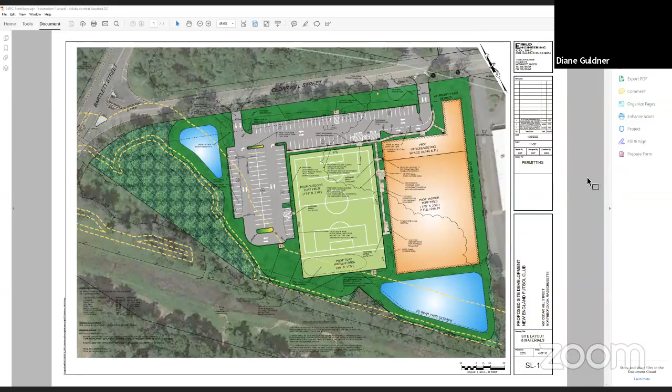Mia, for the most part, I remember this one. We were pretty pleased with the way they were going, right? We had asked for a couple of changes over time. They had made the change, I think, to parking lot size and a few other items. Yes, and where we left it, we had a couple outstanding items that have all been addressed since then. Okay. And they were to get the DEP file number. Was that? Nope. Sorry, wrong notes. Let me grab the correct notes. Here we go.

We were kind of interested in crumb rubber and its effect on the groundwater. And then after our March meeting, we did receive a letter from DCR. And then I threw myself into researching crumb rubber and its effects on groundwater along with Fred. I did find a really useful document; it's called the Coastal Marine Resource Center Policy Projects Independent Group. And they came up with a list of recommendations for containing and managing crumb rubber.

And Rich also was working with some consultants and came up with a large amount of supplemental information that I read through and found that everything he's proposing on site, maybe Rich could take over and show us all the changes he made to incorporate those recommendations. Okay, yes, Rich Riccio from Field Engineering on behalf of NEFC. We met back on March 9th, I believe, was the last meeting. And we were still awaiting a file number, which since came through.

DEP had a couple minor comments on the issuance of their file number. One was that Basin 1 did not have a 50-foot setback from wetlands. If you look at the screen where my cursor is, Basin 1 is the basin on the northwest side of the site, and we were able to massage the grading on this basin so it was completely 50 feet minimum from the wetland system. The second comment was with regards to test pits and soil logs. We do have soil logs on the plans, and we have a minimum of 5 feet of separation to groundwater beneath both detention basins.

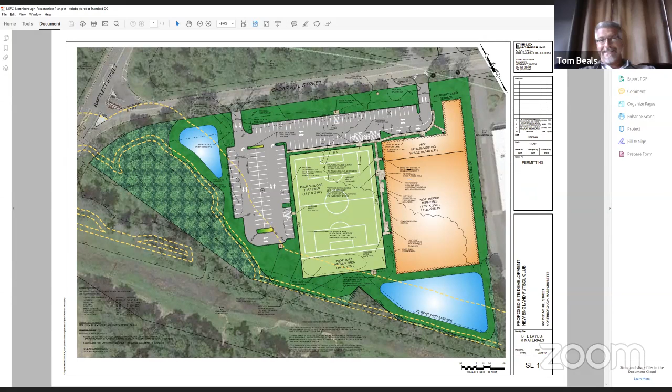Okay, then let's go ahead and close the hearing. Is there a motion to close the hearing? I'll make a motion to close the hearing. Second. Tom Beals made the motion, second from Diane. We're voting. Diane Guldner, yes. Tom Beals, yes. Todd Helwig, yes. Justin Dufresne, yes. Kelly Marston, yes. Myself votes yes. Hearing is now closed.

So we need a motion to issue an order. Do we have any special conditions with the order, Mia? I have a pre-construction meeting, the standard stormwater system boilerplate, and I'm going to append the operation and maintenance plan both for the stormwater system and the Crumb Rubber Field. You get a SWIP with this one too, right, Mia? Yep, I'll get that in there. We need their copy of their SWIP reports.

Kelly was talking about the dumpster being close to the resource area. Do we need to be concerned about trash blowing into the wetlands, and if so, have it cleaned up on a regular basis? I'll put that in there. I just drafted one for Bartlett Street because of 301 Bartlett. So we'll put that in there: trash will be maintained and nothing will enter the wetland. Okay, anything else? All right, we need a motion to issue an order of conditions.

I'll go with it. Motion to issue an order of conditions for Cedar Hill Street with the conditions that Mia mentioned. Second. Second from Diane or Kelly? It was Kelly that time, right? Yes. Okay, let's go with voting. I'm sorry, one second. Justin, were you here at the March meeting? Yeah. Okay, I don't have you on my list for some reason. Then you're fine. We're good? Okay, we're gonna vote.

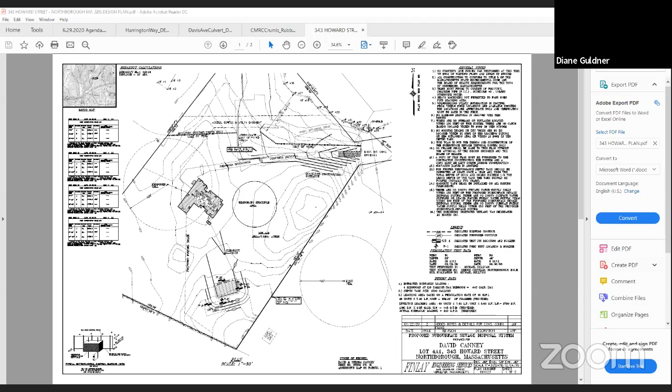Hearing is now closed. Mia, the order has nothing special, I think, correct? No other special conditions, and it's pretty straightforward, very little impact. Yeah, just the standard boilerplate. Okay. Motion to issue an order. I'd make a motion to issue order of conditions for 343 Howard Street with the plans as provided. Second. Seconded by Todd. We're voting. Diane Guldner, yes. Tom Beals, yes. Todd Helwig, yes. Justin Dufresne, yes. Kelly Marston, yes. And myself votes yes. Unanimously carried. Thank you for your time. Thank you. Good luck.

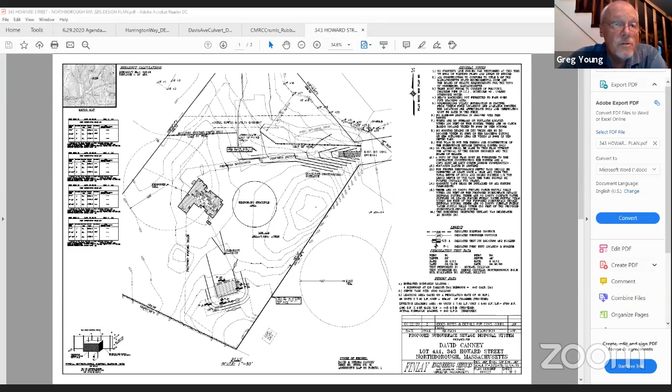Okay. So Mia, you've got to stop sharing your screen, I think. Here we go. All right. Moving right along. I would say we're ahead of schedule, but I don't want to jinx ourselves here. So we're just barely hanging on.

Okay, so let's go to Harrington Lane. Craig Callahan. Let me see who's here. Mark Arnold, he's the representative. Let's see, Mark Arnold. I saw his name. Mark's promoted. Hey, Mark, we can see you and hear you. Great. Excellent. Tell us about Harrington Lane.

So Harrington Lane, this notice of intent is a refiling of an expired order of conditions. It was a subdivision off Washburn and Howard Street with a cul-de-sac coming off of Washburn Street and dead ending. It involved a slight wetland crossing, just impact to BVW and bank. We had a wetland replication area that was already constructed. The roadway base is down. The basin has been excavated out but not finalized. The lots outside the buffer zone are partially under construction. The order expired, we missed getting an extension, so we had to refile to have an active DEP file number to complete the project.

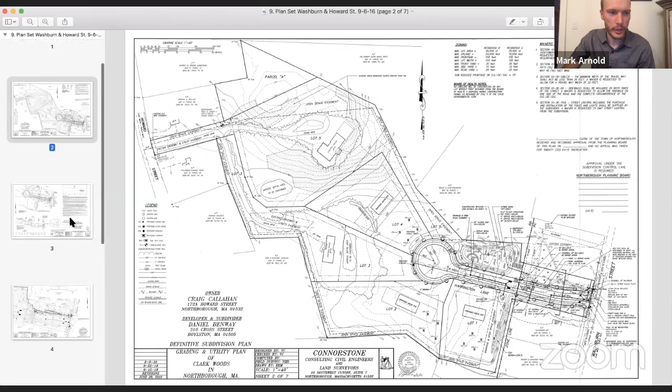So this is the full-size plan showing Howard Street to your left, and to the right you have Washburn Street, with the cul-de-sac road that comes in. This is already base coated all the way in. I'm going to zoom in to another sheet to show you the buffer zone work. Washburn Street to your right. The roadway came in. We had a permanent impact of 375 square feet of BVW, 25 linear feet of bank impact here and another 25 linear feet down here. We built this 600 square foot BVW replication area that also included 70 linear feet of bank interior to the BVW. That's been monitored for 2 years now and is established.

The basin has been installed, including all the utilities. All the catch basin structures are in, all the way up to Washburn Street. And the shoulders are vegetated with weedy vegetation that naturally established there. The project was halted due to a conflict between the previous contractor and the owner, which had to go to court. That's been resolved. So Craig Callahan, the original owner of the property, wants to get the project finalized and have a valid order of conditions so he can complete work under a DEP number.

Okay, good. It would be great to get that done. Agreed. You know, when we were out there last week at some point in time, we met with Mr. Callahan, and one of the questions that we asked him, and folks that are on the commission may remember this very well, there was quite a lot of concern from some residents that lived on Washburn, I think it was, about flooding, and they brought in pictures of people in canoes going back and forth there during high water points.

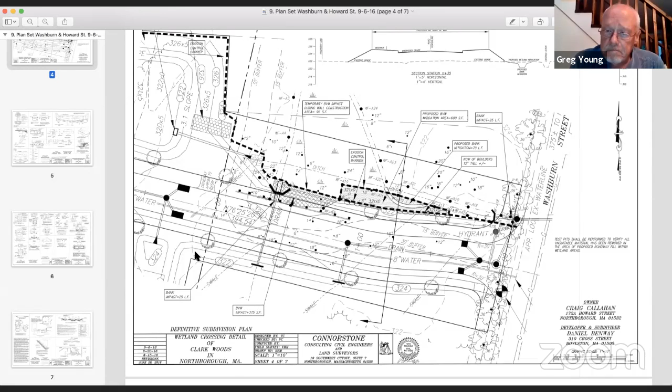All right, so we just can't renew this order? We have to have a new one? No, it is expired. And we did receive some DEP comments. And Mark, could you go through those? Yep. So DEP did issue a few comments. The first comment was about the order of conditions, the narrative. There might have been a typo in the narrative about the original impact.

So this project was originally proposed to impact more BVW and more bank. And then part of the planning board revisions was to make the road narrower and allow us to lessen wetland impacts. So that's what the order actually does, and that's what these plans actually show, which is 375 of BVW and then 50, which is 25 and 25 together, of bank impact, with 600 square feet of BVW replication with 70 linear feet of stream. There was 95 square feet of temporary impacts as well. So that was the narrative question with regards to the order.

So the replication again was replicated. I can pull up the last report that we completed this spring, or was it last fall? I'm trying to remember if I have the spring's report done. But I have last fall's report, and we built it over a year and a half ago.

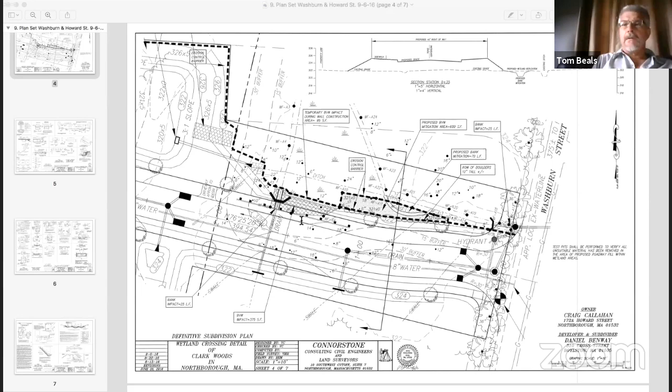The second comment was in regards to the existing stormwater basin, which was noted from aerial photography as having standing water. That's possible because the basin hasn't been brought to final grade and cleaned out and planted. So that's something that would be under the inspection of the professional engineer, which would be Vito Colonna with Connorstone Engineering. I know he's been involved with the construction of this project and monitoring some of the engineering, and he would be involved with completing that monitoring to make sure that basin actually is functioning, and that would be part of the COC request: his confirmation that the basin is functioning as required and draining within 72 hours of a rain event.

The last comment was about the 401 water quality cert, which was the deed restriction on the property. I do know we had that conversation with Craig. I just don't recall if we completed the work or he had someone else do it. I haven't been able to confirm whether that's been recorded or not, but I know that was going to be worked on. I just don't have the page number if it's been recorded. So that's something we do intend to file. I'm just not sure if it's been filed or not.

But I know we did discuss this when we received the order of conditions and communicated that to Craig, that you can file a deed restriction and you don't require a 401 water quality cert. So that was in regards to that. So those were the questions that were raised by Judy Schmitz from DEP. Okay. How does that last item affect our ability to issue an order? It's fine. We can make it another condition that they record the deed restriction. We can just echo it on our order.

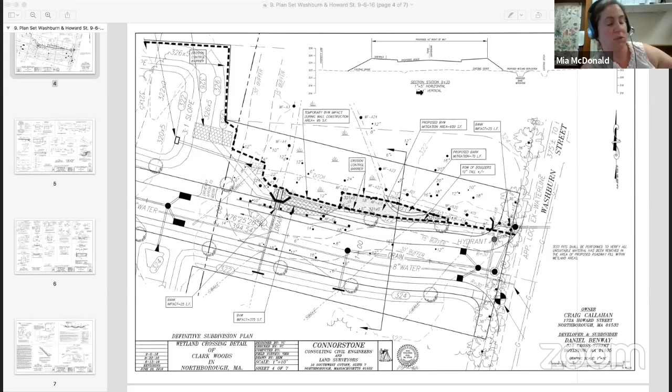Correct, and that's as reflected on the approved site plans, which were from September 6th of 2016. So those plans, which were listed on the order, show all those wetland impacts and the restoration area for permanent disturbance. So those numbers were correct as based on the plan. So the narrative in the NOI, it might have been unclear that those were the old impacts that were reduced. Because that was the original notice that was filed with larger wetland impacts, and then we revised the plans and shrunk the wetland impacts to get approval.

Okay. Okay. I guess just a quick one for Greg and Mia. You mentioned you were out there last week. Do the erosion controls still look good, or do they need to refresh those before starting construction again? I think they could use a little refreshing.

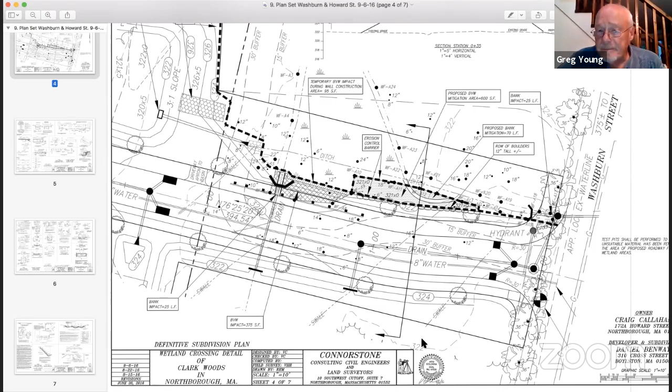That might be something I guess we probably want to add. If we're going to issue a new order, if construction's been stopped for a while, if they still need to clean out the basin and get it mucked out and put the final grades on that, there's still a good amount of site work to do. So at least get the erosion controls freshened up. Yep. Makes sense. The straw usually doesn't last 3 years. Yeah. It's probably due to be replaced. Yeah, it does need to be replaced.

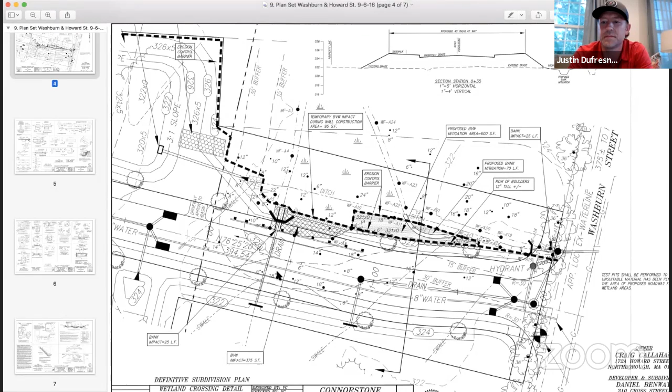I didn't notice any erosion around the replication area and around the basin when I was on site last, but again, I think it does need to be replaced. Perfect. This plan shows an erosion control barrier between the mitigation area and the wetlands. That's been removed because the mitigation area is fully functioning. So I think that should be fine. I guess just areas where they'll be doing some site work up gradient of, if they need to do final grading and loaming and seeding, then those areas. But yeah, understand that between the mitigation area and the wetland, that should just stay as is. Makes sense.

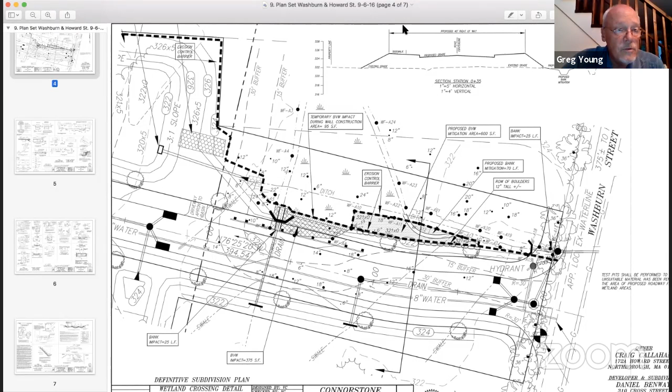Any more comments from the commission? Any attendees have any questions or comments? I don't see any hands raised. Okay. Let's have a motion to close the hearing. Move to close the hearing. Motion by Todd, seconded by Kelly. We're voting. Diane, yes. Tom Beals, yes. Todd Helwig, yes. Justin Dufresne, yes. Kelly Marston. Kelly Marston's on mute. Yes. And myself, yes. The hearing is now closed. Kelly, I'm glad you were on mute for that reaction. Okay, so hearing is closed.

Mia, special conditions we're going to have? Go ahead. So far I have the deed recording, the mention of the wetland resource areas. That's a note to myself to use the old numbers from the old order, and that the erosion controls are installed. So it'll be our standard erosion control installation. Yep, okay, good. We need a motion to issue. So I would move to issue an order of conditions for Harrington Lane, subject to the conditions that Mia just identified. And one more is that the stormwater operation and maintenance plan will be appended.

Is there a second? Second. I think that was Diane. Yes. We're going to vote it. Diane, yes. Tom Beals, yes. Todd Helwig, yes. Justin Dufresne, yes. Kelly Marston, yes. And myself, yes. Good deal. Hey, I just have a quick comment. I believe that was under the old setbacks, correct? So we're going to just go with the original drawings because of the old setbacks. Yes. Grandfather it in, yes. Thank you.

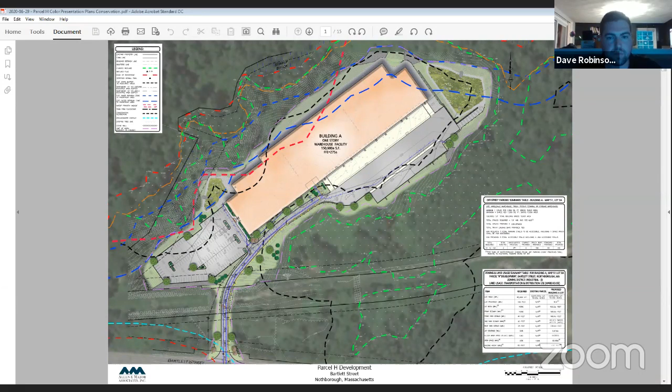Okay, could I share my screen? Might be helpful. Yep. I stopped sharing, so you should be able to. Okay.

I'm sorry, Dan, can the commissioners see the plan? I'm not seeing anything, no. Yeah, I was just gonna say, nothing's up. Okay. Still the same? You're not seeing anything? Same. No. Okay, something's not working. So I can pull any plan up. Which one is it, Dan? Okay, it's the wildlife habitat evaluation. Okay.

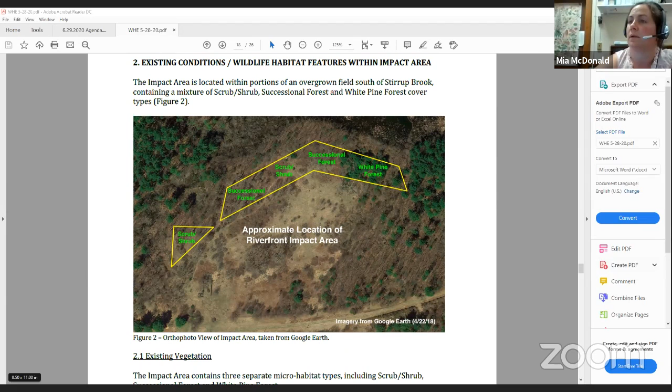So I guess, Mia, if you could open the habitat restoration plan. Sure. And scroll down. Yeah, up a little bit above that.

Okay. Right here? Yeah, if you can zoom in a little bit, this shows an overview where we're proposing this restoration area. It's to the immediate north of the building. And if you go down to the next one, it zooms in. You can see it's about 29,000 square feet, and the limit of work is that black dashed line. This restoration is going to take place in the inner riparian zone all the way up to the edge of the river. If you go down the next page, Mia.

So yeah, and zoom in on that. So I'll kind of walk you through the reasoning for choosing this area. As you see labeled on this figure, to the right, you see the blue line, that's Stirrup Brook as it flows from west to east, just to the north of this restoration area. To the left of this photo, it's a narrow channel through a forested wetland. And then as it enters this photo on the left, it's a very wide shrub swamp, but it's very dense.

There's no real open pockets of water. And then where the blue arrow ends, just to the north of the restoration area, that's where it opens up into a real open water habitat with deep marsh. That area is the most likely to be used by ducks, geese, things like that. When I was out there in the spring, there were pickerel frogs calling. A big part of why I selected this area is it provides a physical buffer between the building and this critical wildlife habitat feature of the open marsh.

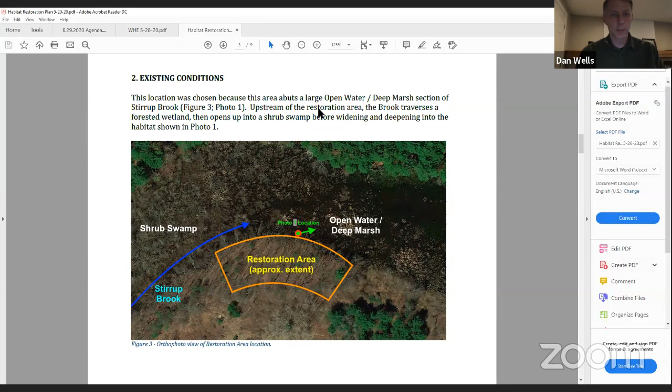And if you scroll down to the next page, Mia, there's some photos of the existing habitat. So that's what the open marsh looks like from just on the edge there. You can see there's clearly good habitat for ducks, turtles, waterfowl. If you go down to the next page, Mia, this shows what the habitat is like in the actual area to be restored. All that light green vegetation, that's multiflora rose, bittersweet, honeysuckle, and some glossy buckthorn.

But another favorable reason for choosing this area is because, as you can see, the size and scope of those invasives is not 100% cover. It's manageable, in my opinion. Whereas in some parts of the site it's over 6 feet tall, and it would just be a futile effort to try and manage it. But a lot of this you can actually dig up by the roots and totally eliminate it. You can see most of those trees growing in there are native red maples. There's some high bush blueberry and winterberry.

So the approach is to try to dig up all those invasives by the roots as much as possible. If that isn't successful in the first season, then we put in treatment with herbicide. But just by removing those invasives, a lot of the native ground cover is going to spring back to life. We're also proposing to supplement that removal with plantings, 48 native shrubs, high bush blueberries and winterberries, and then 60 native ferns.

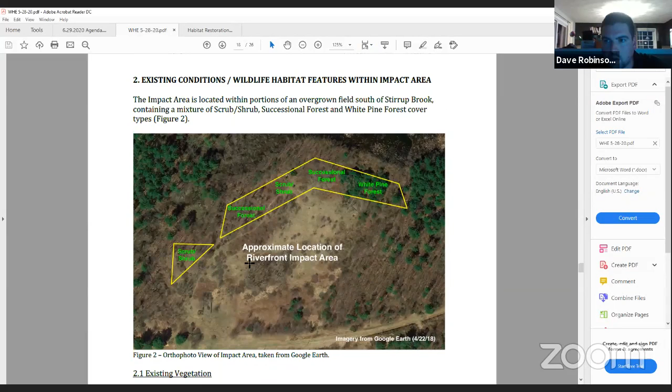David could share his screen with the plan showing. Oh, I am screen sharing. Let me see if I have a plan. Here we go. So this black line is the limit of work. That's the 100-foot buffer to the wetlands. And then the blue line at the rear is the 100-foot buffer to the riverfront, flagged riverfront.

Okay, so behind the blue line, I'm just trying to picture it with the pictures we saw on the screen of the swampy area. So the swampy area would probably be right behind that blue line. So the closest is over here where we have wetland, but it's not riverfront area. But that area, I've walked it, is all forested upland. It really doesn't get swampy until you get to the very toe of the slope. So anything up on that slope is pretty dry.

We've walked it a couple times, and it really only starts to get marshy once you get closer to the Stirrup Brook from those wetland flags. In here. Yeah, and even further in. Okay, thanks. I was just trying to compare this drawing to the photographs we saw. Does that help, Amy? Does that answer your question? Yeah. Good. All right, thanks. All right, thank you.

All right. So Mia, if we are good there, we can move ahead. No more commission questions. We can move to close the hearing. So moved. Who's that? Todd, motion to close the hearing. Second. Second by Tom Beals. Oh, Tom, we have a quorum. I wasn't at that meeting. Okay.

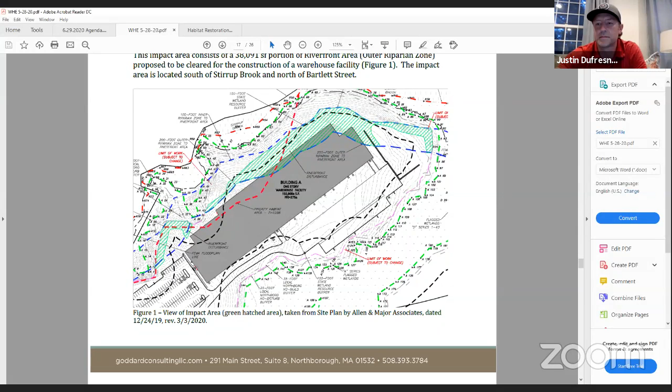I've seen it before where you could get a reduction in parking, which could change drainage calcs, which could change the size of a basin, and if our order's already been issued and it refers to a set of plans, then you need to reissue it and everything. So just want to make sure. Okay. All right. I think we're good.

Thank you, gentlemen. Thank you very much. And Dave and company, thanks for working with us. I know there's been a lot of give and take and discussions here, so. Yeah, you guys have been great to work with. I really enjoyed it. Everyone, thank you. Thank you. Drop some people here. I think that's it. All right, just us.

Okay, well, we're cranking along at 8:30. I mean, we can pull out our second hidden agenda item we haven't even talked about yet. We go till 9 or 10 or so, right? I hope not. Oh, no, no. So I think we can knock these out quick.

Yep. The certificates. Certificates of compliance. Yep. I visited all 4 sites. They're all stable. They're all built as approved. No issues. The only issue that was outstanding was 124 Howard Street. They built that wall and then we required them to put in some blueberry bushes. Yep. They did, and it's complete. Good. So there's really no issues at any of them. If anybody has any questions about any of the particular sites, I can answer them.

No, the Coleman House was a long time ago. Mm-hmm. Yeah, no, I'm good with the ones that I know. Anybody else have questions on those? Nope, not for me. All right. Can we vote them all at once? Yep, we'll just record it all 4 times. You don't have to roll call it 4 times. You can just say issue the certificates of compliance for these 4 properties.